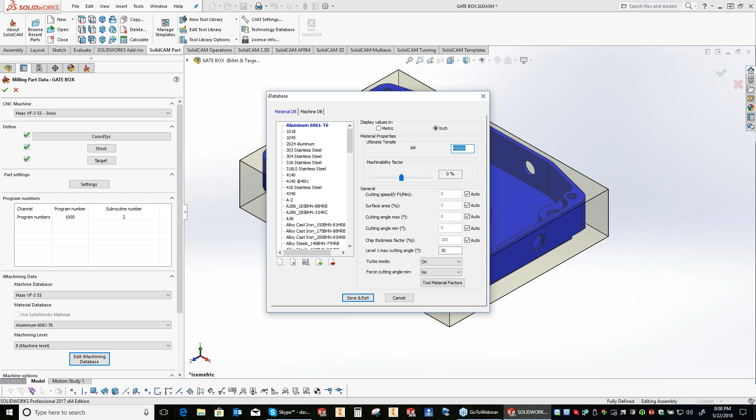Or what you can do is keep cranking that up. Just add 1,000 more to it. Go to 46,000, 47,000 until you find a really optimal feed and speed there for iMachining. Or you can play with this. I just think it's easier to do that. Anyway, moving on. Any questions about that? Hopefully not. No, looking good. All right. So we're going to move on to here.

First thing I do when I'm creating the stock and target, and I kind of blew through that really quick, is I want to make sure that I have good values down here for the facet tolerance. This means a lot. In turning, it's set at 4 tenths for the target. That's a really good value because it affects two things. It affects how accurate your silhouette snapshot of the side view of the part is, and it also affects what the stock and the part look like initially coming into Solid Verify.

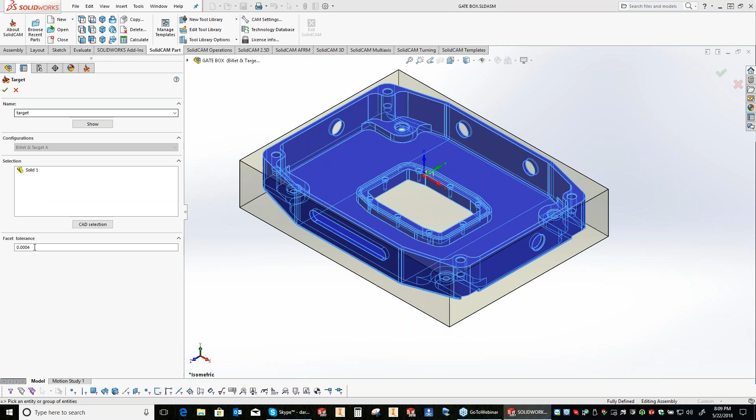So when it comes to the stock, I put it at 4 or 5 tenths, it's fine, and same with the target, generally 4 or 5 tenths, and I leave them alone. Now when we go into the solid model, and I'll talk about that when we get in there, there's some other facet tolerance that has to do with the tool, but the initial look of the part coming into Solid Verify has to do with those two values we just looked at.

So to speed up some programming time, templates are always the way to go. So if I come into, say, a face, templates can be created multiple ways. They can be created individually, or, well, I don't have any other toolpath right now, but you can actually highlight the toolpath in the list, right click on it, and create a process template, which I can't do right now because I'm not actually selecting processes, but I'll show you that here in a second.

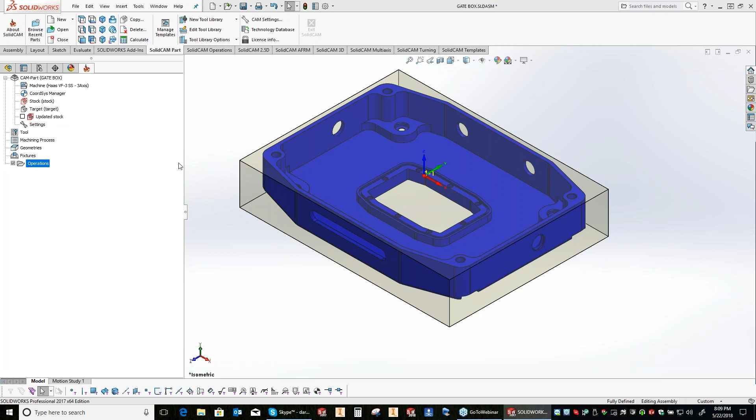Face templates, if you're not using them, or any kind of template - any toolpath can be templatized, just like probing or 5-axis, it doesn't matter. They all have the ability to create a template. You could set all your settings, or maybe you just always want one particular setting on, and you can have your template always come up. So every time you pull up face mill, you can have a very specific template come up. I don't do that on the fly, but you can do that.

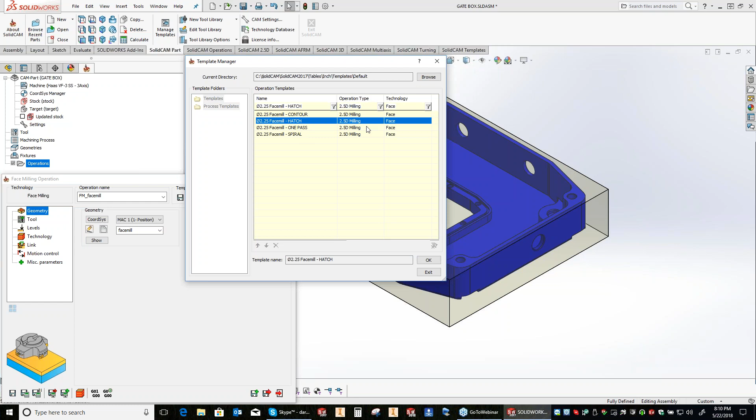What I have done is set up some common facing that I do: contouring, hatch, one pass, spiral. It all depends on what the part looks like. Generally in a square, I'm going to use a hatch, sometimes I do a spiral - it just depends on what the part looks like. But as soon as I open it, it's going to fill out everything except for geometry and levels, because that generally changes per part.

Now, this face mill name came from when I actually saved it. Now I can get rid of that and say new, or I can actually use that name and just edit it, and that would be fine too.

By default, it selects stock. Here's the other benefit of picking a 3D solid as your stock - it always shows up as a drop-down menu item rather than having to pick a model, chain of face, or pick a face or chain of profile. It's automatically here, so you get an extra benefit out of using that.

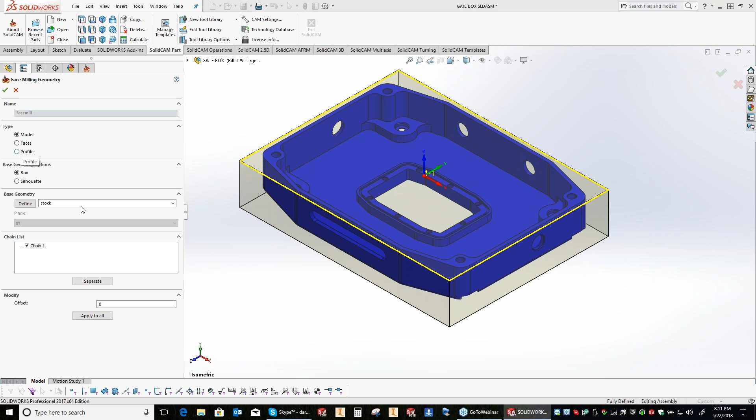Darrin, can I stop you just for one second here? You bet. We do have one question - when you were playing around with that stock and the target with the facet tolerance, is that affecting the toolpath quality for that particular part?

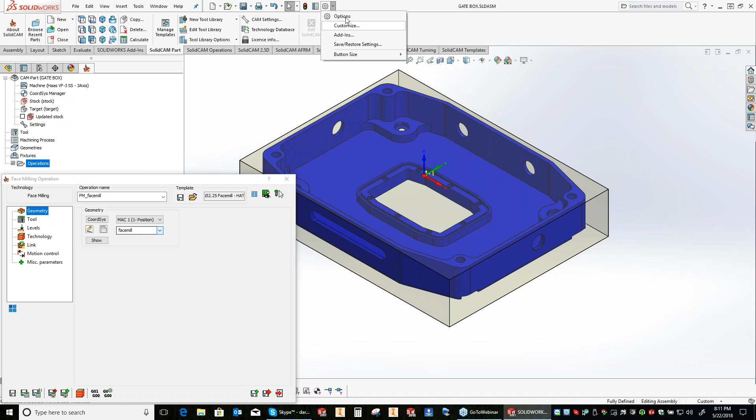No, not at all. It's got nothing to do with G-code in any way, shape, or fashion. It has to do with how pretty the part looks, kind of like the facet tolerance in SolidWorks. So if we zoomed up on this part right here and took a look at these corners, you can see the faceting right here. That's just a visual of what you're looking at.

Now, obviously, if you go with a really tight tolerance, when you're playing around inside here, your rotation could be slower, your computer can run slower. So what you're looking for is the best possible fit for your computer. If you're working with 6 inches and smaller parts, getting down into the tenths is no problem. But if you're working with 30-inch or 10 foot parts or something like that, you don't want to be in the tenths, otherwise it's going to bog everything down. So what you're shooting for is quick response. I have a 3D mouse right here, and if that tolerance was really, really tight, it would probably jerk a little bit or run a lot slower.

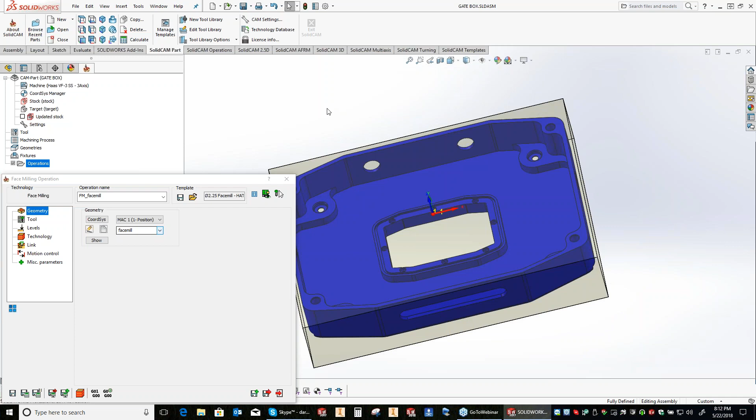So I forgot to mention that it does affect two things - it's not just the look, but the performance of your computer. So I think that answers it. What do you think? Absolutely. So the tighter the tolerance, the more horsepower is going to be required for the machine. Absolutely, but the end result is still going to be the same for you guys.

Yes. The only time a tolerance is going to affect it is if it's inside this tool dialog box here - then that will affect the actual toolpath. Any tolerance outside of a toolbox or a toolpath cycle means nothing. Well, it doesn't mean nothing, it just doesn't affect the G-code. That's all.

And kind of what Darrin is talking about here is like when we were looking at the HSM, the HSS, you guys have that tolerance that's built into the operation - that tolerance will affect your G-code. But 100%, yes, the stock and target are not going to affect the G-code.

So now, if you're cutting splines - because obviously when you cut an arc, you don't need a tolerance, since you're cutting IJKs or Rs, so it knows how to do an arc - there is no tolerance to mess with. But if that's a spline, then there will be a tolerance, and I forget where it's at now. There is a tolerance in here where you can adjust it. It might be on the first page, or advanced. I'll have to find out - I don't know if it's in face mill because you're not going to cut splines in the face mill generally. But anyway, there is a tolerance when you're cutting splines, and sometimes when you're actually in the geometry picking it, it'll be at the bottom of the dialog on the left-hand side.

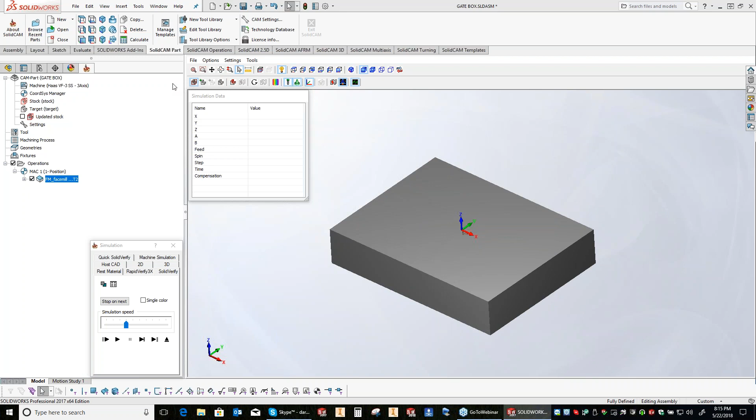Now in Solid Verify, how this part looks - this is simply square, but if I had rounded corners here, the tolerance we set in the stock and target matters. However, when the tool starts touching this stock, that tolerance is right here, and it almost always sets at that value. Like I said, I generally keep it down about there.

And I'll just show you - it's actually not going to matter on the face mill. So we'll go ahead and do a quick iMachining toolpath on it so you can see that a little bit better. So let's do that.

Now iMachining is definitely one of the toolpaths I use a lot. If there's just no better way to rough than in 2D, or even in 3D - you can actually rough out parts with the 3D iMachining, but it is just roughing. And then you would go ahead and finish with pocketing or profiling or something like that.

I prefer to use 2D iMachining with 2D parts. Yes, there might be a little more picking because you're going to be picking the edges. As 3D, it always works, just like in turning - it works from stock to target always, but it makes it very easy because you don't have to select anything, unless of course you want to keep the tool within a certain area. So 2D iMachining - definitely get used to it.

Since we have that new smart face technology, it makes the 2D iMachining much easier to grab chains. Yes, the smart chain thing is very cool. I'm glad they added that.

They've also added this dashboard. It's been in here for a little while, but not super long. Basically, anytime you see a dashboard, it's going to give you all your important information all on one page, so you can see it real quick rather than going all the way through this if you didn't want to. However, I'm going to go ahead and go through it.

We also added rough and finish not too long ago, simply because the tools last so much longer. You can do a 1 off, 2 off, 3 off part, no problem - your tool's going to be brand new when you pull it out. Now, of course, I'm talking about a part like this, 40 or 50 inches in length, and you're cutting a lot of material out. Then yeah, you probably want to do a rough, rest, and a finish with different tools.

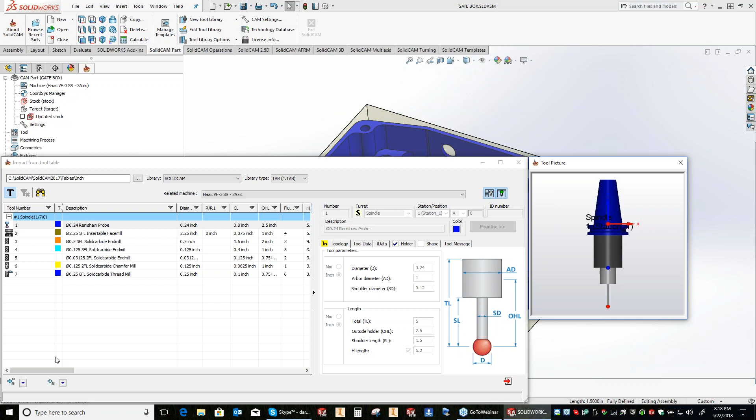That was a duplicate right there, because my face mill actually brought in my tool. You can elect not to bring the tool in, because there's a little checkbox at the bottom when you save a face mill to say go ahead and include the tool. I don't need two of these, so I'm just gonna get rid of it. Right now I'm just gonna grab me a half inch. I'm trying to think if there's anything in here that I need to talk about, not really, so we'll move on from there.

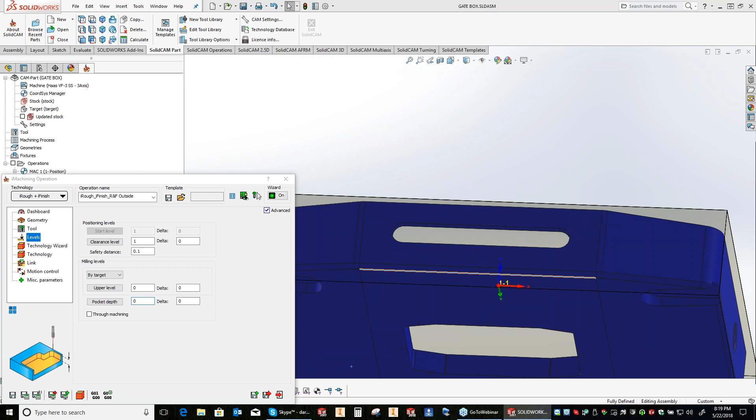As far as levels go, you're just gonna pick the maximum. The 0 is fine, that's where we're starting. And I'm going to go ahead and pick down here. In case you guys are wondering, if you haven't run into this, there are 3 ways to pick depths. You can pick a depth using a face, and notice how it turns yellow.

You can have any color you want, but that's actually remembering the persistent ID of that feature, of that face. You can also pick a vertice. The vertice will also remember. It's interesting that it's different - it might be down a little bit lower because it starts to bend - or you can pick an edge. A vertice or face remembers the ID, whereas the edge does not.

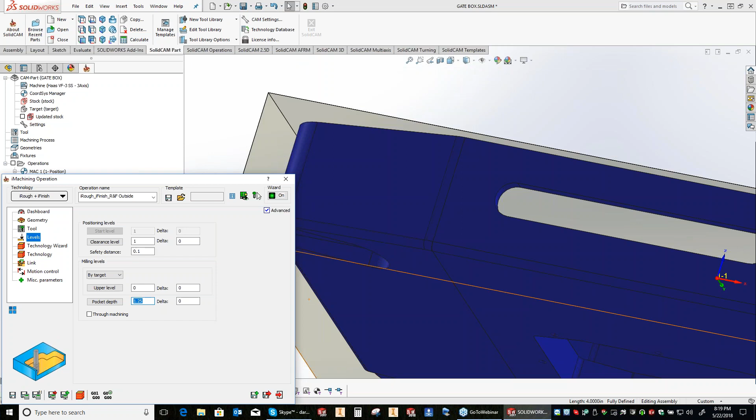That simply means that, let's say for instance I picked the top vertice here and the bottom vertice here, and then I put in a -100. If this wall gets thinner or thicker, my tool is always going to go down 100 thousandths past that if it changes. But if I don't have these IDs associated, and say this was 125, I would only be doing a total distance of 1 plus 125 - only 225. If that went to 250 thick, I wouldn't be cutting the whole thing. You'll get used to that.

Most of the time I'm just picking off of edges, because the other thing about that - when you go into templates, personally, if you're going to write a template, I would recommend not selecting vertices, picking edges, because then those values aren't tying to a certain ID of some other file. So I wouldn't do it that way.

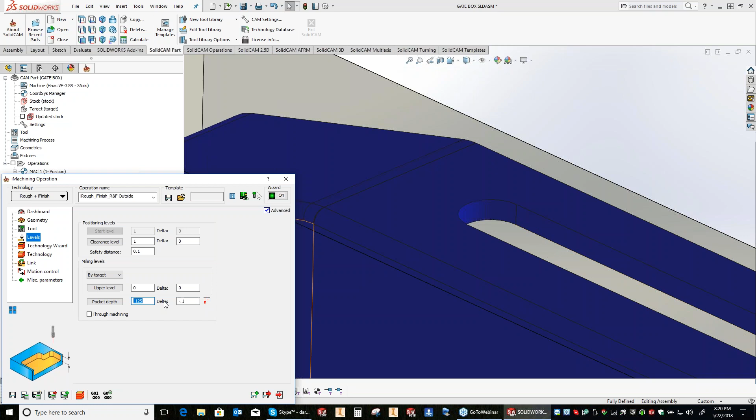Anyway, I got off a little sidetrack there. What we want to do - go ahead. No, that's a good note there, because even myself, I always pick off of a surface, so I keep it associative. But yeah, that makes sense - if you're picking off of a surface and using that as a template, when you guys go to bring in that template, it's going to try to be associative to that original face. Well, that original face obviously isn't there anymore, so it's a great point to know there.

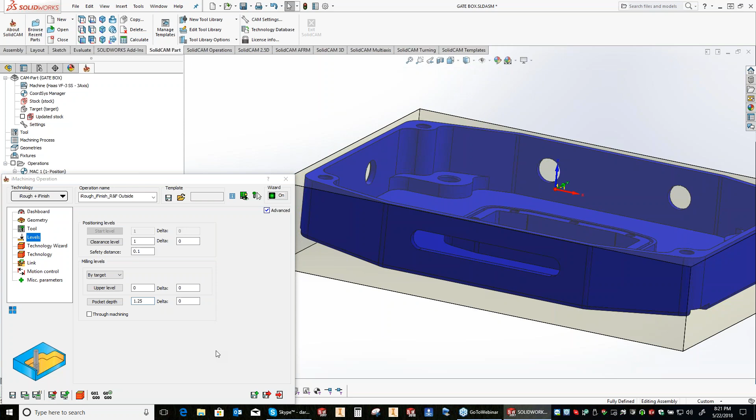And a lot of times the system can find your values for you. About 50% of the time that comes in already populated for me. Why, I don't know exactly, but it does. And I want to go a little bit further, so we could put a negative there. You could just add it right here. I'll just go an extra 50 thousandths.

Everybody's pretty much aware of iMachining, so I'm not going to go through too much of what's happening here, but I will tell you that if you're not getting the perfect result that you're looking for, the first thing that I would change would just be the step down value. You can do that by a step down amount, or by the number of steps, and every time you do that it may increase this.

Let's say I did step downs and I did say 4, okay? It will get thicker on this - what's it doing here? Yeah, 2.4. Let's try that, it should get thicker. What's going on here? Oh, all right - step down, no, number of steps is what I meant to do. Sorry. So there are 4 step downs at 322, and notice how the side gets thicker. That's the way it works.

But sometimes this ends up into a better result. I would never recommend doing it like that - I'm just saying, in a deep depth of cut, you might, even though it can do 2 inches, you might think about doing 1, because you can actually get faster cycle times, believe it or not.

So anyway, I don't know if I mentioned when we were doing the night classes before with the iMachine, but we have the red, yellow, and green. Green is always optimal. A lot of phone calls that we get are, what's the best tool to use for iMachine? Well, it's going to tell you if it's green, yellow, or red, and that's all based off of the

ACP. So maybe you guys are running a high helix, and maybe we shouldn't be running a high helix, or maybe we're running a 2 flute and we should be running a 5 flute. So play around with your number of flutes, and your helix angle is really what's going to control that red, yellow, or green for that ACP. Right. The ACP stands for axial contact point. Basically what it means is how many flutes are fully engaged in the material at one time.

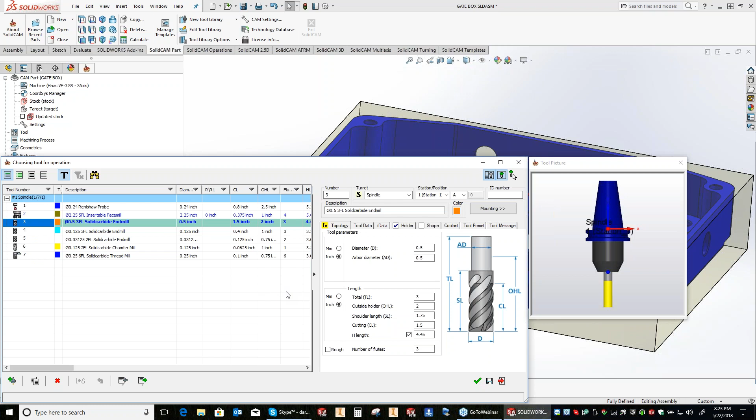That's all it means. Now, what he was talking about, Kevin, is that there are 5 parameters on the tool that iMachining looks at. We look at 3 on the machine, 1 on the material, 5 on the tool. The ones on the tool are the diameter, obviously, the cutting length, the number of flutes, and then in your iData, you're looking at the makeup of the tool, okay? And you're looking at the cutting angle.

45 is basically standard. Now, I don't like 2 flutes. I think they're loud, because they're opposite each other. I like 3 flutes when it comes to the softer stuff, and 4 to 5 flutes when it comes to the harder stuff. If you're picking a tool for iMachining for aluminum or something soft, what I highly recommend is polished rounded flutes. You don't want a cheap tool. I could name a few, but I'm not going to.

When the material hits that flute, it has to do basically a 90 to get out of there. The best tools are at least rounded, and then they're polished if they're a really nice tool. And I'll tell you one that works really well is a 1/2 inch Blizzard tool. That thing is beautiful. It's quiet. It runs great, and it cuts a long time. The coatings don't matter. We're not even paying attention to the coating. Okay. In harder materials, coatings matter. I would still use the coatings.

In aluminum, you don't want coating, because coating actually works better the hotter it gets, like TiCN, TiAlN coated. The hotter it gets, the harder the edge becomes. So in harder materials, that's a great thing to use. But when it comes to aluminum, it doesn't hurt it, but you can actually get a better result if you don't have coating on it, because coating actually rounds the edge a little bit. So you want to stay a little sharper in aluminum. Let's just back up here.

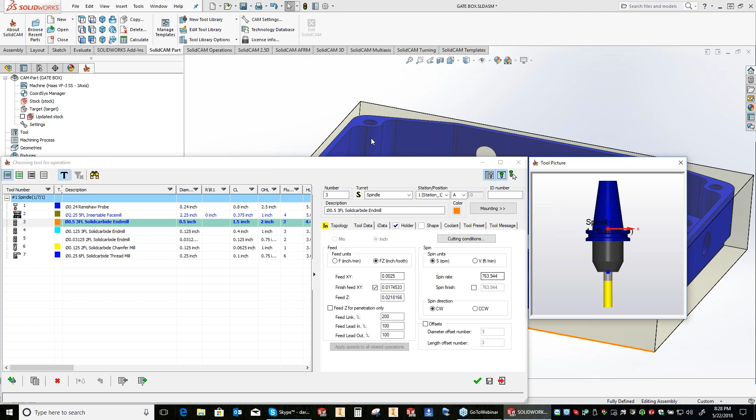Okay. Anyway, where am I? Let's close that. Where are we at? Okay, we were here. So basically, when it comes to red, yellow, or green, it's really talking about tool life. That's all. Green is obviously the best, but I couldn't quantify it for you, green versus red, how much longer it's gonna last. I don't know. Because the technology is still great the way it cuts, because we're managing the side engagement rather than a depth of cut. And the best thing about it all, honestly, is the fact that we don't bury the tool anymore.

Now, I do want to show this in case people haven't seen it before. Why this technology is amazing is, let's say that's the wall you're cutting. Okay, and then we have a tool. Then we have another wall. Okay, and then we have material. Let's say the material is going this way. Actually, we'll undo that. Let me do this. Okay, and then, let's say it's the same amount of material that you're taking off.

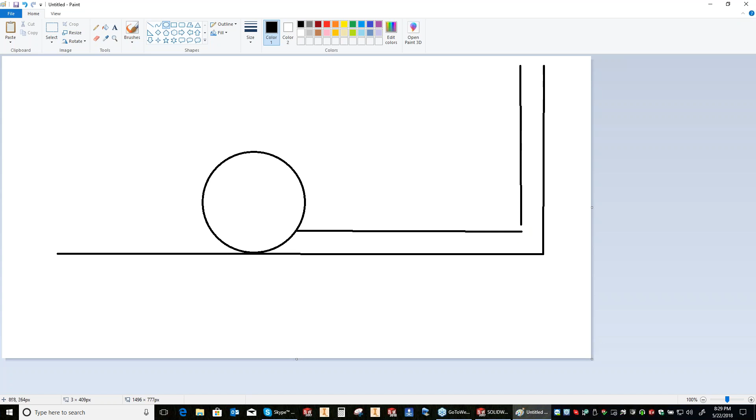The problem with traditional machining is this. It's simple, and I know you guys know this. I know this is the wrong size tool. Sorry. Let's do it again. All right. So what we're managing in iMachining is simply a cutting angle. Okay, we're managing that right there. But see, once you hit it with the same exact material on that side, the over-engagement of the material on the tool is detrimental to that tool.

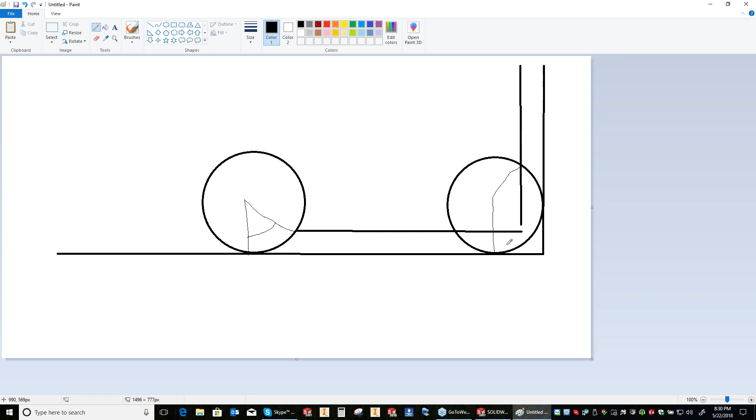We've done 4 years of research on this and seeing what happens to this, especially as we're going this direction. What happens to the tool at this point right here, this pressure vector, is horrible. So we don't go over 80%. You will never see this, even in aluminum, ever get past 80%. 85 to 90 is where all the bad stuff happens.

So what I'm basically saying is, when you go into those corners and hear those squeaks, you're basically hearing your tool deteriorate. Yeah, because it's creating micro fractures. It's heating up and cooling down real fast, taking smaller depths of cut, all that. Anyway, I'm not going to go any further now. I know you guys know that.

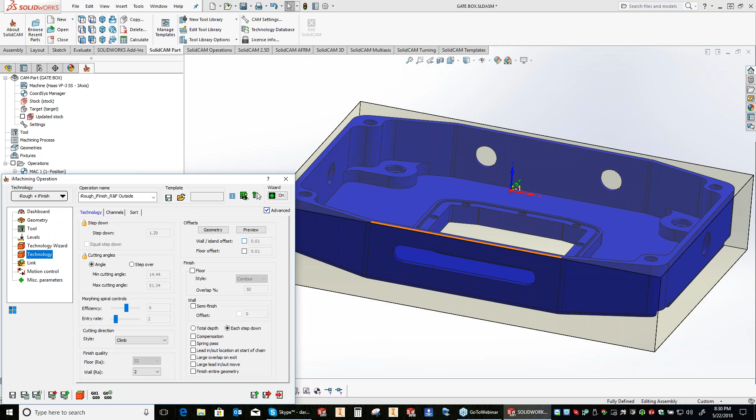Let's go ahead and leave 10 for the wall, and we were going to go into solid verify for some reason. I don't want to get off track here. Simulate, solid verify. Now, there was a reason I came in here. Oh, yeah, that's right. The tolerance that we were talking about. Okay, so basically what that tolerance is, let me pause it right here.

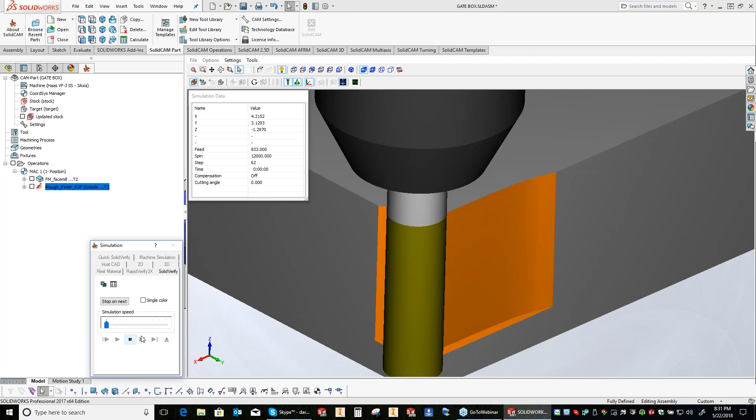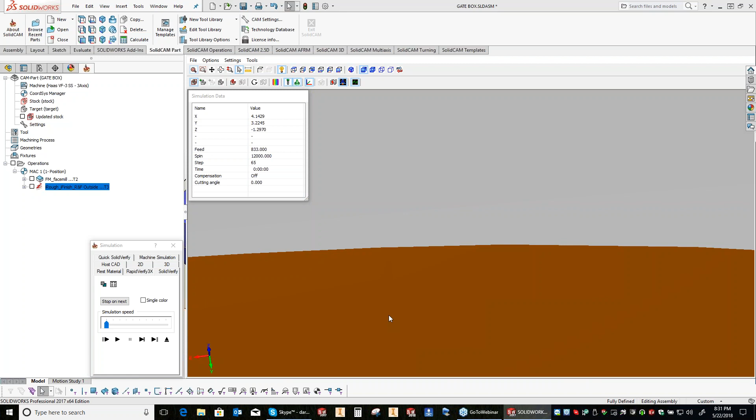This tolerance, this accuracy right here, is a tool facet tolerance. So if we look at the tool, it's the facets of the tool, which means wherever this touches, it's the same faceting. That's harder to see on that one, but you're basically getting the same faceting that you see on your tool. That's what it refers to. So the tighter the tolerance, the prettier your part looks. Let me go ahead and play this out. And this has nothing to do with your G code. Correct, no bearing on it whatsoever.

But it also plays into, so there's your tolerance. You can see your facets right there. That's a little better. When you go to use your compare, if anybody ever uses compare, I gotta explain this in case you don't know exactly how this works. Everybody knows that computers are binary. They're ones or zeros. That's it. Every little thing in your computer is a switch to flip up or down. It's on or off everywhere in the computer.

That also means, in the early days of programming, they had seminars about GPF faults, which is basically anytime you divide or multiply by 0. Well, this is all in line with that.

Basically, what I'm saying is, if we were going to do a compare and execute this, notice how this is red, green and yellow? That's because of the tolerance that you set up here, and that accuracy, that's the tool's tolerance. And you can see it waffle between green and yellow. All yellow is between 0 and -5. All the green is between 0 and +5.

And you're thinking, well, wait a second, could I be up to a -5 and a +5? No. Going back to that GPF, you never want to divide or times by 0 in a computer language, otherwise you get a GPF fault. So the value that actually came out that you actually cut could be a positive 0.000000002 or 10 or 15, doesn't matter. It's way past the tolerance that your machine is going to hold anyway.

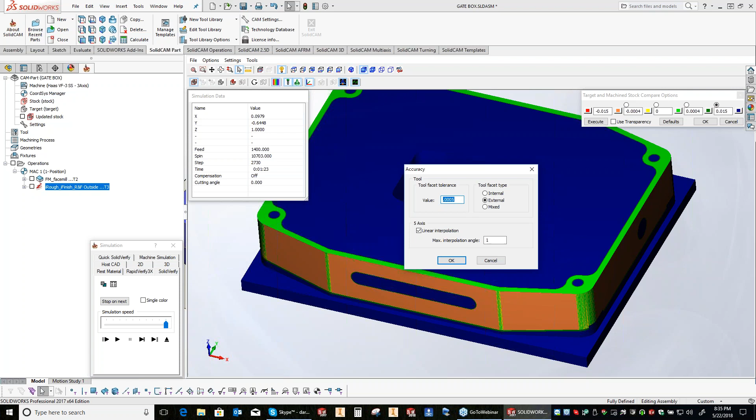Now, I caution you against this unless you've got a really nice computer, because we will take it down to 1/10. We'll take it down to 1/1,000,000th or beyond if you want to. A lot of CAM systems will lock these out, and they won't let you do something like that. That's insane. You can do it if your computer can handle it. I don't recommend it. So just know that this value, you can only go down to within this value up here.

Yeah, and for the solid verify stuff in here, and we're kind of getting a little off subject here, but for all these little icons that Darren's talking about, like the stock target comparison, holder, all that stuff, we're actually going to be going through that next week in the night class for you guys. I know there's always been a lot of questions of, I see all these icons, but what are they doing for me, and how do I use them to benefit me?

Oh, that's cool. Yeah, that'll be nice. I know most of them. I don't use them all, but that's probably the most important one, but I won't talk about it because you're going to do that next week.

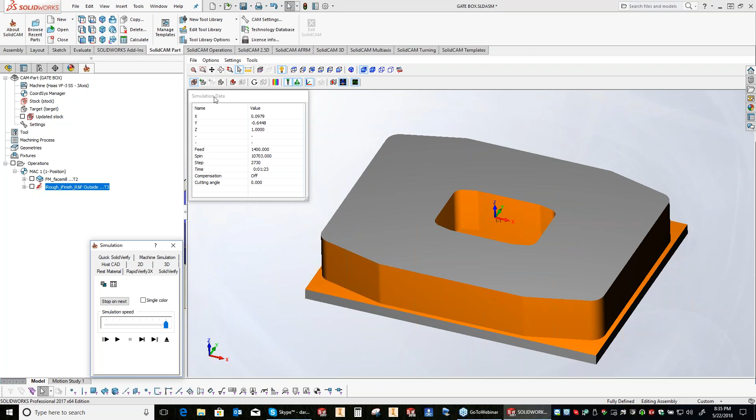So anyway, moving on. Now here's how I can program faster. I use a lot of templates and I use a lot of save as copies. I've just filled everything out, and that could have come from a template, so it could have made my life even easier. But I filled it out once. It took me a minute maybe. Now I can just simply do a save as copy. Anytime you do a save as copy, it creates a brand new one, exactly identical. And if you use a template, either one, the only two items you have to check are geometry and levels.

I'll also tell you this. Once you pick the geometry, so if we go into the geometry and I say new, I always pick areas that have already been milled out and I mark those open, okay? And then I want to chain this pocket here, and we'll call that pocket. I like to name my stuff. Now, if I go to my levels now, it's going to call me a liar. No, it didn't. Good job.

So basically, because my upper level has not changed, it actually found the next level down. I can test that by putting my cursor in here and selecting the edge. It's still 875. So really, the only thing I had to do is a save as copy and change my geometry. Everything is identical, but I get a different toolpath. And I can do that again for the floor. Save as copy. Now this is really neat too. I'm going to check just the geometry and just the levels again. So my new geometry is going to be the floor.

Okay, and then you guys know that you can go up and down because it doesn't really matter what it looks like from the side view. It matters what it looks like from the top view, in 2D. So I can do that, or I can do here, I go up, down, doesn't really matter. So I'm going to chain those two, and we'll call that floor.

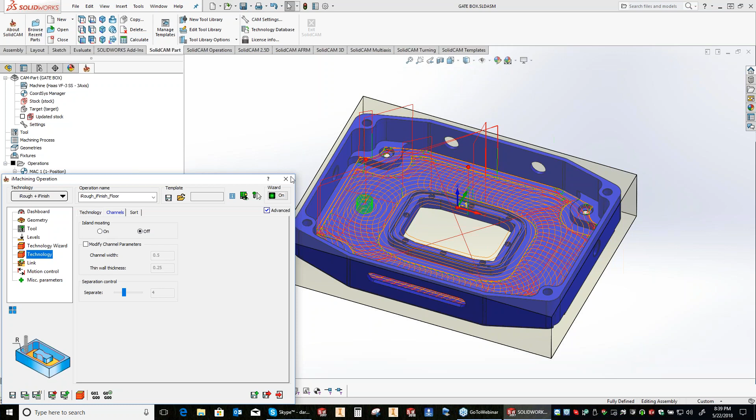Hope that made sense. I'd prefer to do it that way. That's more of a D-slot style cutting. So saving copies is definitely something that can really save you a lot of time. But again, if you want to set up your templates to turn on and off things, it's definitely a good way to go.

Now, as you guys are going through programming parts, I know Ronnie's got some pretty crazy, nasty looking parts that he does every once in a while. But if you guys are doing a lot of family of parts, definitely set up your tool library. Take the time to set up your tool library of all the tools that you have in your shop. And then also take the time, as you're going through these parts, to create the templates for these ones,

because as you run this on the machine, Eric is saying, man, that sounded great, the surface footage was good, my step downs were all good. Create that as a template, and remember that you have that as a template. So when you go to run that same tool again with a similar pocket, you can just grab that, and it's automatically going to have your tool and the speeds and feeds of that tool. Everything's going to be preset except, just like Darrin said, the geometry and the levels. That's all you have to set. So definitely use those templates as much as possible.

And Darrin, would you say that you use the templates more than anything, or what's your take? I use a lot of templates, but I use saving copies all the time. That's my favorite thing to do. And sometimes I'll even jump up here and do a Control-C, Control-V, because you can do that as well, even from one setup to another setup, and just simply change the coordinate system. So if I like it, I just come up here and grab that one. It's got my right tool and everything, and I can copy it down here. I do a lot of copies. Now, the templates that he was talking about were not just inside the individual toolpath, but multiple, like let's say you wanted to do those.

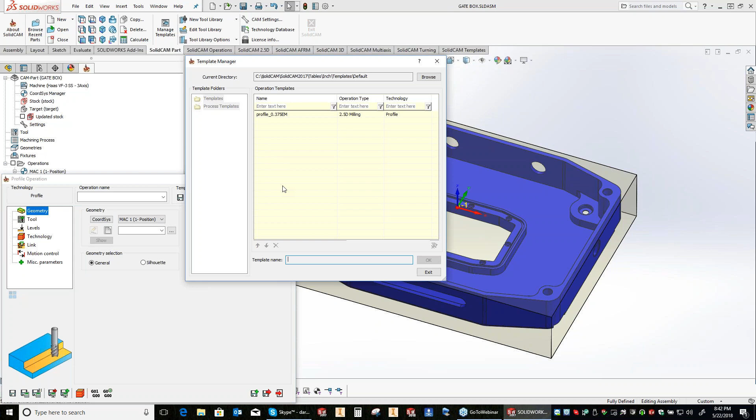Let's do a pocket or a profile, okay? And then if I go to look for my templates, where are my face templates? Well, they don't show up because I'm not in a facing operation. It's only going to show my profile templates in a profile operation and a face in a face operation. So if you've created them and you're like, I don't understand why they're not showing up, that's why, because you have to be in the operation, okay?

Other things to speed up your programming time, and I'm not saying all these are great and you have to use them all, but there are some pretty cool things in here. I would like to make broaching a little more robust, but I'm glad that we have it. There's a lot of ways that you can do slotting, and a lot of these use iMachining type toolpath as well. I personally have slots like this. I use profile, and I do a ramp down just like an O-ring grooving. But O-ring grooving, let me just show you that actually.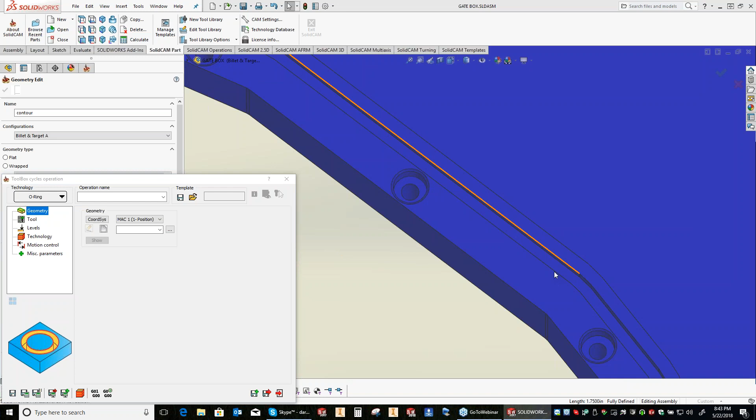What's nice about this is it actually tells you what to pick. It's visual. We have like 4,500 pictures in the product. So it tells you to pick the two top edges. So if we come over here, and by the way, if it's a straight O-ring, you can grab the bottom edges too. It doesn't matter which one you grab first. It doesn't matter the direction of the arrows. Just grab the two top edges or bottom edges. If it's a dovetail, you want to pick the top edges for sure.

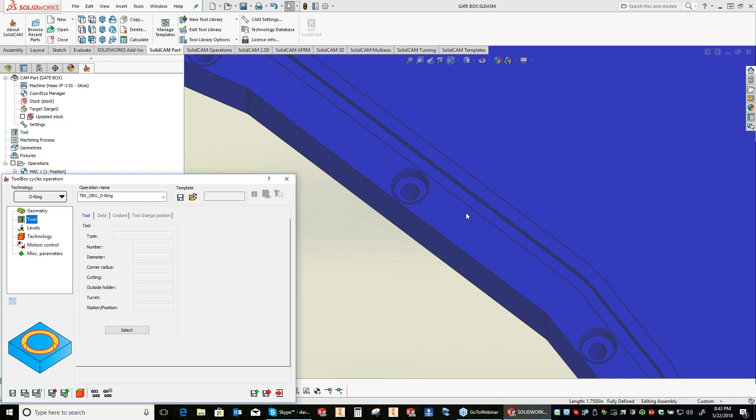Okay. Let's go ahead and do O-ring. Now, what I like about this is it's very similar to a template. It's similar to iMachining in that you're going to fill out geometry, tools, levels, and then technology is going to kind of take over for you. So let's go ahead and do tool. And the best thing about this is you don't have to figure out how wide is my slot. You need to put a tool in that'll fit, but you don't have to know the difference, and this is why.

After I pick my level, so we're going to start here, and we're going to go down to here, and I can pick the edges too, but what happens is that it's looking at all this stuff, and now based on that tool, it's saying I'm going to drop 15.6 thousandths per pass. It figured that out for me. That's what it wants to do. Now you can increase that. You can overwrite any of this. But here's the best part about it, about speeding stuff up.

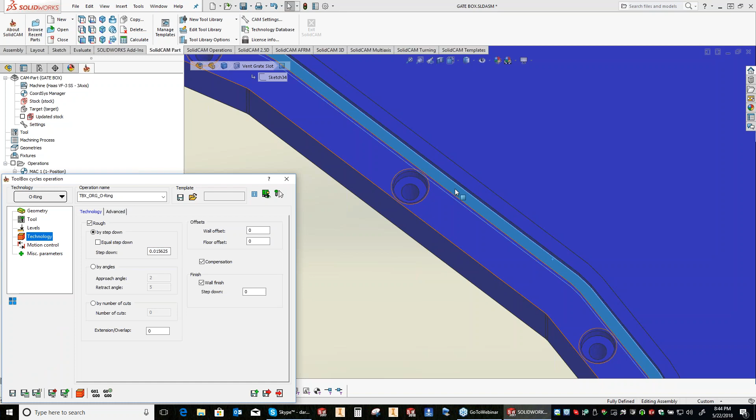Say you want to do a wall finish and a cutter comp. You don't have to figure out your straight line move, how long it needs to be in order to turn cutter comp on so you don't get an error on the machine. You don't have to figure out how big of an arc it needs to be. Actually, let me turn that off and let's first do this so you can see the ramp down. Okay, so there's the ramp down.

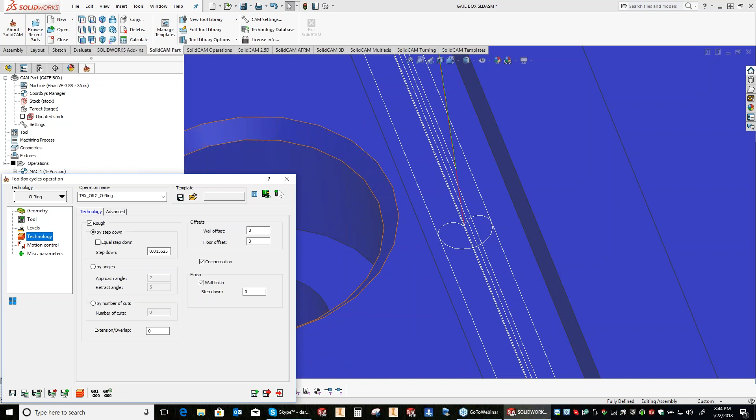Now, if you decide to go ahead and do a finish, we need a straight line move to turn cutter comp on, and we need arc ins and arc outs in order to do finish passes. That's where it comes in handy and does it for you, so you don't have to think about it. Now, you could do this with the profile, but then you'd have to figure out your arcs and stuff like that. It's not that difficult. It's just faster in here. That's all I'm saying. So definitely, find the ones you like.

This is definitely one spot that gets majorly overlooked inside the software: the toolbox cycles. There's a lot of really nice stuff in there to help you guys out. Darrin likes the O-ring one. My personal favorite is the additional zigzag slot for doing slots. It steps down in a zigzag pattern, but also factors in something like an iMachining morphing spiral to get that slot wider, and then does one final finish pass. That sounds awesome, I haven't used it either.

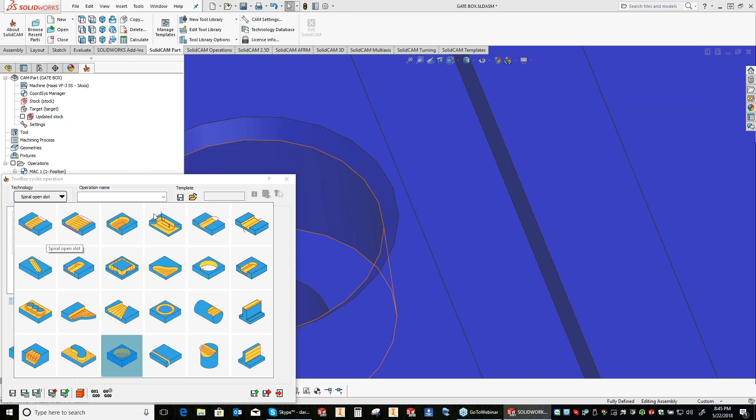Obviously one of the fastest things to do is your automatic feature recognition. We're not known for feature recognition, however I think we do it better than everybody else, not because I work here, but because we don't have 15 levels deep you have to go in case it doesn't work. Here's the other benefit of working inside SolidWorks, especially with a native SolidWorks file: we're actually taking the criteria from the actual hole wizard that you produced that hole with, whether it be a tapped hole, counterbore, countersink or whatever. We take that information and use it to create everything for you, including the tools.

Now how do we do that? Of course we have to have a dialog box, but we only have one. We don't have 15 or 20 or 25. If something goes wrong, you only have to look at one thing. Actually, you don't even have to look at that - you could just open up the toolpath and change it.

For instance, the feature recognition hole wizard process - right now this is our first iteration of this. We put it on hold, and it's been out for a couple of years. We wanted to see how it did, and now they're starting to work on it again because people really like it, and it works fantastically out of the box. You do not have to set this up. It works just like this. I didn't have to customize it for this at all. I built the part, tried it on it, and it works.

Simply put, you pick a tapped hole, and it's going to find all the other holes that are identical to that hole - depth, diameter, everything. Once it finds it, it'll turn them purple on mine. It may change colors on yours depending on what you have, and it'll turn this little check mark green. As soon as I hit it, it's going to build the tools mathematically and the operations for you based on the actual criteria it needs right in here. If you happen to have the tools in your library, it will use those. But if it doesn't, it'll create them.

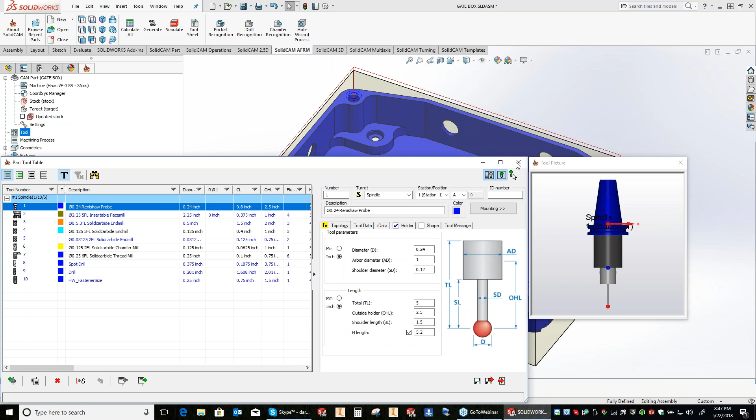Now, can you replace these? Absolutely. Here's the other reason why I think it works better too. In most other feature recognition systems, if something's wrong in here, you have to delete these, go look for that problem in the database somewhere, fix it, come back, and then rerun it again. In ours, it's just a toolpath - you can come in here and adjust anything you want.

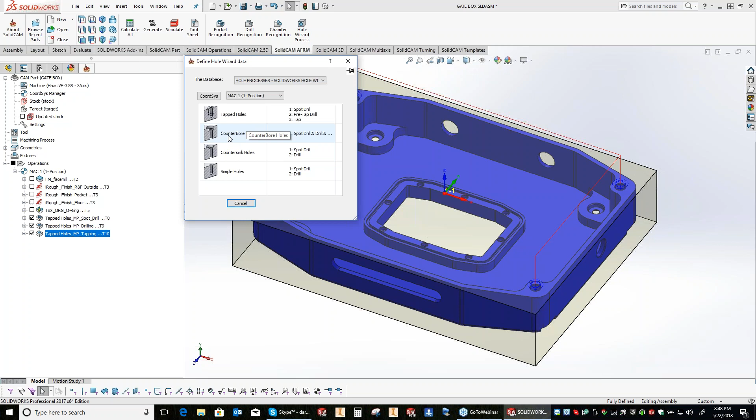The cool thing is you could start out with a quarter 20 - I think that's what these are, quarter 20s - and then manipulate, go into each one and change them around, make it a tap for a helicoil or something, and then come back and create your own template. That's a simple way of doing a machining process, and I haven't even talked about that yet. I'm going to show you guys, let's do one more with the counterbore, and then I'll show you the 7 different ways I know of programming faster. Some will work better for you and others won't, but I'll still tell you all of them I'm aware of, if I can remember them all.

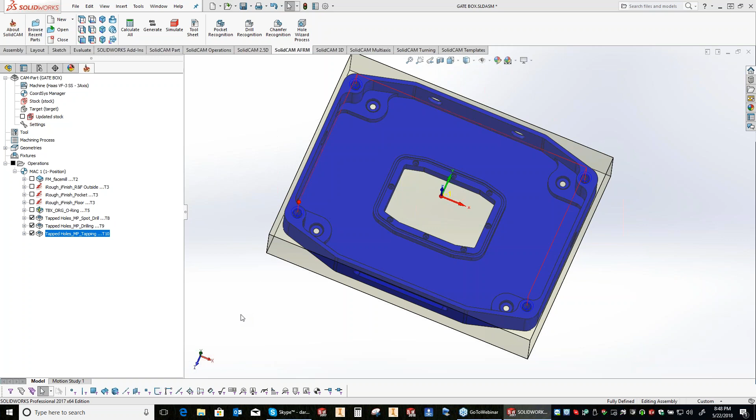So I'm going to go ahead and grab that counterbore there. Again, it's going to find - why is my mouse not working? It'll find it, and as soon as that turns green, there we go. Found those holes, select OK, and it'll create your tools for you. Now, before I go any further, there are 7 ways to program faster, not even using the hole wizard or anything like that.

Templates is one of them, okay? Saving copies is two. Machining processes is three.

Creating a multi-process template is another. Then you can do things like this. Let's say all these tool paths, in some form, you probably can use on a different part. What you can do is just take all these tool paths and apply them to a new part. How do you do that? Well, you first come up here and save this job as a new name. This one's called gate box, but let's say I'm doing another box of some sort that's similar, or maybe it's not similar at all. It doesn't have to be.

I do a save as, and I rename it to the new part name that I'm going to open up. So I start with that. It's going to close this, and open up a new project with all this stuff in here with a different name. Then you come up here again after it's open and say change model reference, and you can actually pull up the new part name. Now it closes it again and pulls up the brand new part.

It has all these toolpaths, and now you can take these and simply apply them to that part. You'll have all your tools, all the feeds and speeds, all that stuff in here. Again, like a template or a saving copy, all you have to change is your geometry and your levels. That's all you have to change. Now you might want to change the tool because that particular part got a little smaller, but that's just one way of doing it.

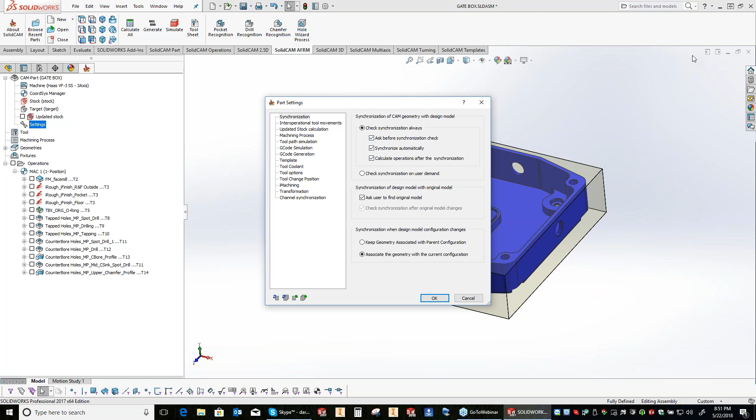Let's say I want to look at the configurations and be in fully automatic mode. So I'm just going to switch it to current configurations, and turn all these on so it updates automatically. Now what you must do is rebuild and save it. I think you can just exit, but I always end up saving it. Then open it up again, actually. That's all you have to do.

Now, by the way, guys, you know we don't have a save button technically. We have a save, a save as, and a close. Close is the proper way to close it, save as is the proper way to rename it. However, if you use save as, save all from SolidWorks, it does save our project.

Okay, now that I've set that up for a new part, watch this. I'm going to turn all these on, so that's all the toolpath for this particular part. I can jump into configurations. I'll go to my worst one, which is a lot smaller. It's coming up saying, hey, do you want me to check the synchronization? Yes, I do. Obviously I've changed my toolpath here, so yes.

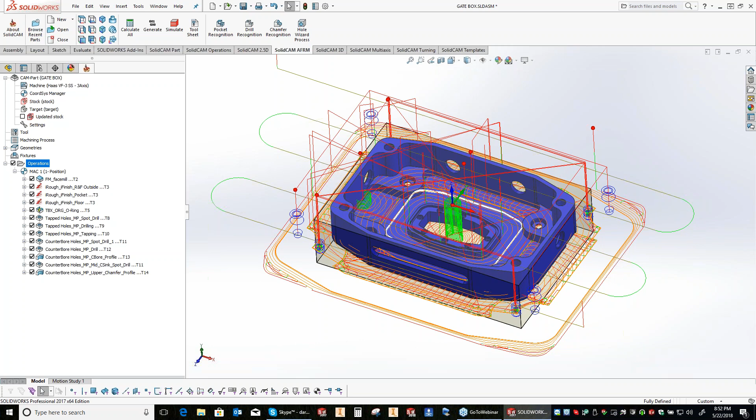Now I'm going to come back here and see if I can get that open. What it's going to do is look at the new configuration, walk through there and reset all that for me. Now, there are some things that can happen.

For instance, on this part, I could have adjusted it to make it perfect, but I didn't want to, because then I couldn't show you this. Let's say I go back. Okay, that part got really small. Let's see if I can get back here and... come on, click. There we go.

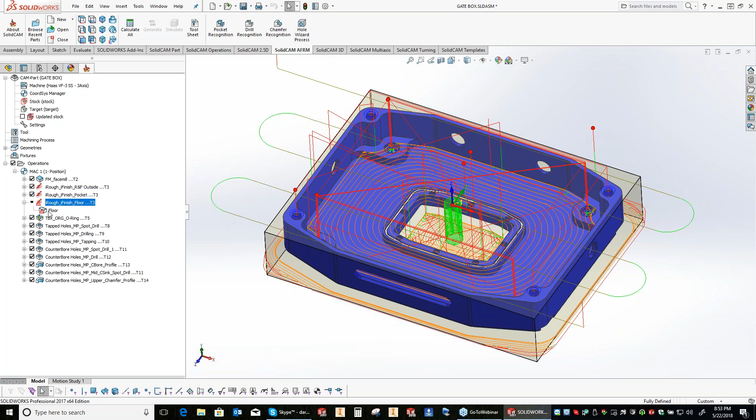See, this one right here didn't fully regenerate. You can always hit the little plus sign here and it says floor. Something's wrong with the geometry, the floor, because I named it floor. Basically what happened is when I shrunk it down, this little edge right here—and that might be a bug. It's possible, Kevin. That's up to you to let me know.

This disappeared and then it came back. Technically it should find that edge again, so I think it actually is a bug. But to fix it real easy, you just go to your floor geometry, edit, and redo it. Just repick it, so we'll do this.

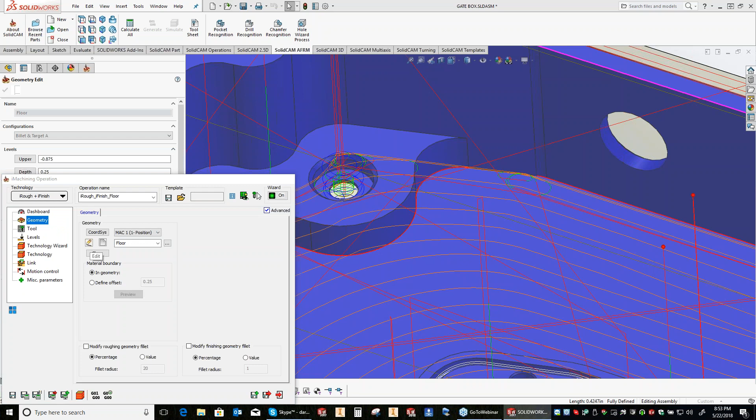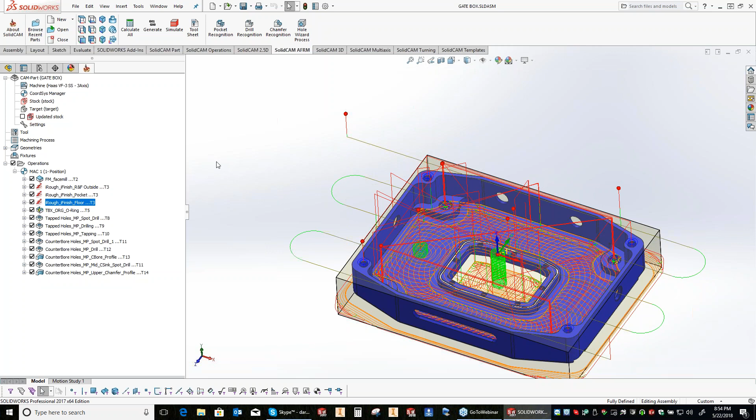Another easier way Darrin could have gone about that is, instead of hitting the plus button down, you can just right click and modify the geometry from right there without even going into the operation. Yep, something I never do. See what I mean? I don't know all the tricks, but you can right click and edit, generate a sketch, show, synchronize, whatever you want to do. With Kevin and Darrin, you guys will learn all the tricks. There's so many ways to do things in here, just like in SolidWorks—you just have to decide what works best for you.

Now, last thing I'll show you guys, it's really amazing. If you haven't been using it, you should. The chamfer is just really cool—that's a user-requested feature, multiple people hit us up on it. You can pick individual edges or click the whole thing and let it parse the model, then come in here and delete the edges you don't want to chamfer. Pick a tool, preferably something small so you can get nice and close to the wall. That's why I always have my certain tools around—I've got a little 1/8 inch with a 45-degree chamfer on it. Looks like that, real simple, okay?

And then put in your chamfer size. You don't have to have the chamfers on here, maybe you just want to break the edge. There you go. What's cool about this is it's a 2D toolpath, yet it'll give you all the different depths and stuff, and that's usually a no-no when it comes to 2D toolpath—only 3D toolpath does that. Normally you have to do these individually if you're going to go at different levels. But that's going to speed stuff up for you guys a lot.

Now I'm sure there's a lot of other stuff, but we're about out of time. Any other questions? Now's your time, Ronnie, to pick Darrin's brain, or anybody else—Ben, Carlos. My brain on several occasions. I'm not seeing any questions come through here. There's been times where... oh go ahead, go ahead. No, go ahead.

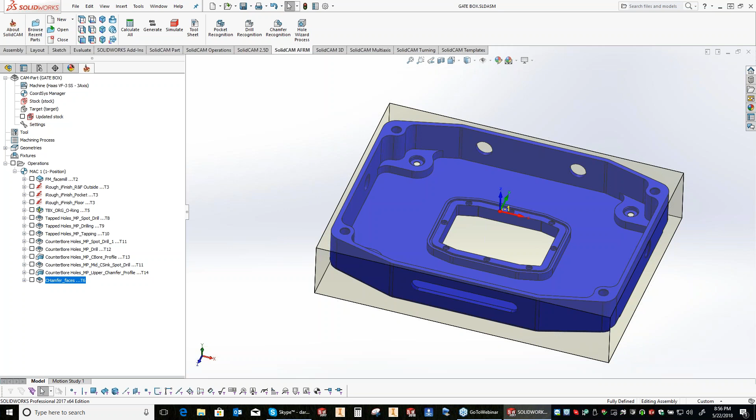So now, is Eureka one of the G-code simulations? Yep. No, it's not. This is. Yep. Oh, it is. Oh yeah, there it is—Eureka. Yep, okay, it's right there. So basically, when you generate G-code, you can have Eureka automatically open up your G-code and you can verify directly from there, which is nice. Yep, and it's going to pull, or with Vericut or any of the other ones.

Yep, and what we'll actually do, guys—I still got a couple guys, there's quite a few guys still in here—we do also have Octopus in there. Octopus is more G-code as well, but it also deals with robots, with welding and so on and so forth. Do you guys have any interest in seeing how Octopus works with SolidCAM as well? Just throwing that question out for everybody here. Yeah, go ahead and vote.

I'm just going to give you my opinion—you know, Vericut is awesome, it's hard to learn but it's awesome. There are two trains of thought here: some people swear by G-code and say that's the only way you should be verifying, and then you've got our stuff, which is machine simulation, internal machine verification. Just FYI, both sets have to have a reverse post. The reverse post is what actually makes the G-code work in the machine, and it's also what makes the ink file internally work. So it's really six of one, half a dozen of the other—it's what you prefer, but they're no more accurate than the reverse post that's got to be created. Sure.

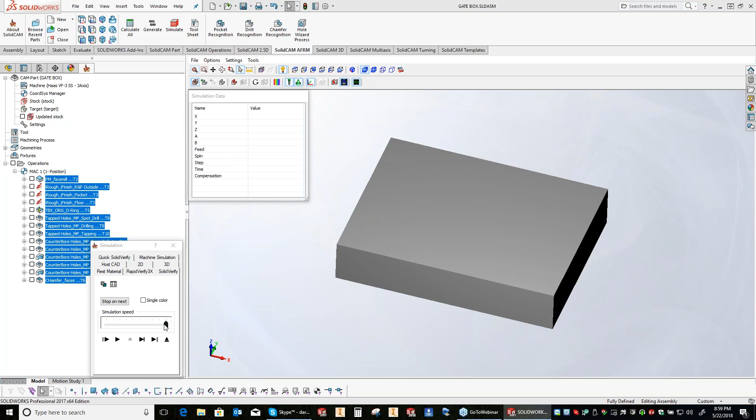Actually, there is one more thing I want to share with you guys. If you're trying to verify really fast in SolidVerify, there is another way you can do it. This can slow it down or speed it up, and I will just tell you that ball nose tools are always going to run slower because there's a lot more faceting going on. But if you're already up to level 8 or 10, and it's still not running very fast, and you want it to go faster, just simply set your general right here.

This is showing, I always hit defaults, this should say 0.004. 15 frames a second is about the same as 1 G-code line, basically. That's what that says. And so let me hit that, and I'll show you how much faster. Let me go back, and I'll just rerun it so you can see it. I was talking, and I didn't get to change it in the middle of it. So general, let's start with 1. Okay, I'm all the way up here.

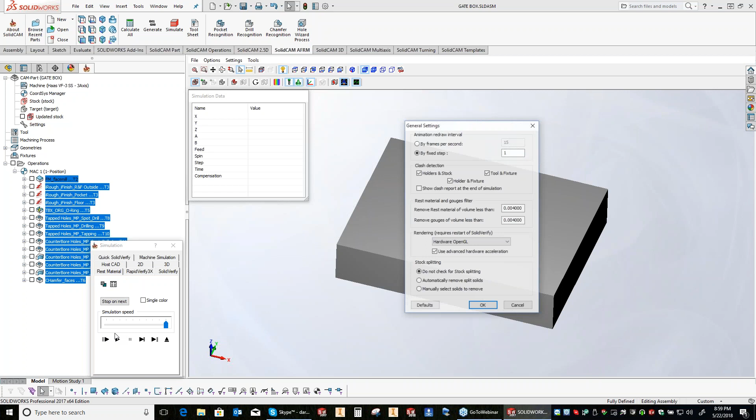But now if I change it to show every, say, 30th move, it's way faster. Or 100th move, whatever you want. I think it only goes up to 99. I've tried above that, 999. Well, I don't see a big difference at that point. So up to 100 is what I've seen a difference on, and that's about it. So yep. Just FYI.

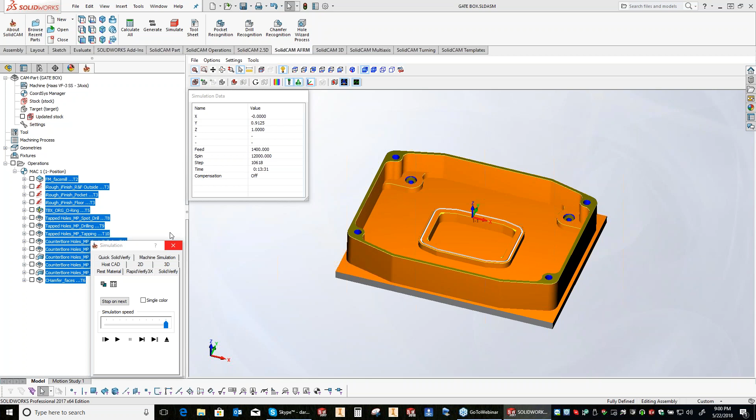And Eric is asking, can you show how to do the multiple configurations again? And Eric, correct me if I'm wrong. How to build them or how to set it? I think how to set it up in your settings. So when you're doing multiple different configurations, how to have that set up in settings. And Eric, if I'm misreading that, please let me know. There are 2 ways to do it.

If all your parts have configurations, I would go like this. I'd go into your main settings when it opens up, and then go into, where are they? I never set it up from here. Yeah, synchronization. Now I'm in a part which is grayed out, but you can say it's always a current configuration, and then you can check these. Now this one right here, I don't normally check, but I do if I'm going to do configurations, because anytime you switch, it automatically sees that, and then it synchronizes automatically and it calculates automatically.

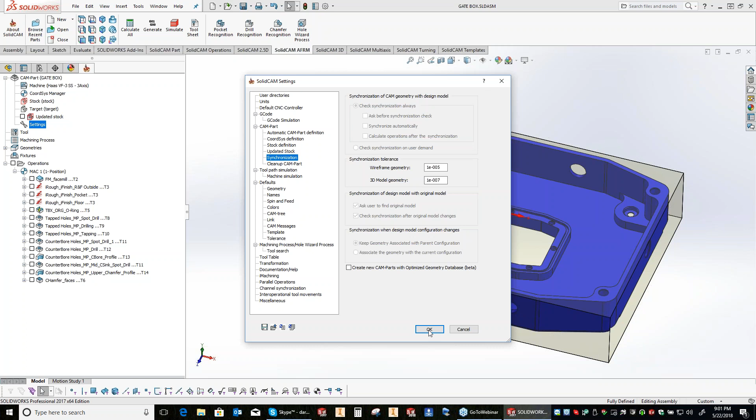This is important. So I would check this one and then all three, or all three and then this one, whatever. Because that way, anytime you switch configuration, it'll automatically update. Now this is if you're going to set it from here, if all your parts have configurations. If they don't, only one or two, start your project and then do the configurations from here. Notice how the settings, there's a lot less. Basically, it takes the main settings from here and it pushes down all the stuff that would apply to this part. That's why there's less stuff. Okay, and all the other configurations are based on the whole entire CAM-Part.

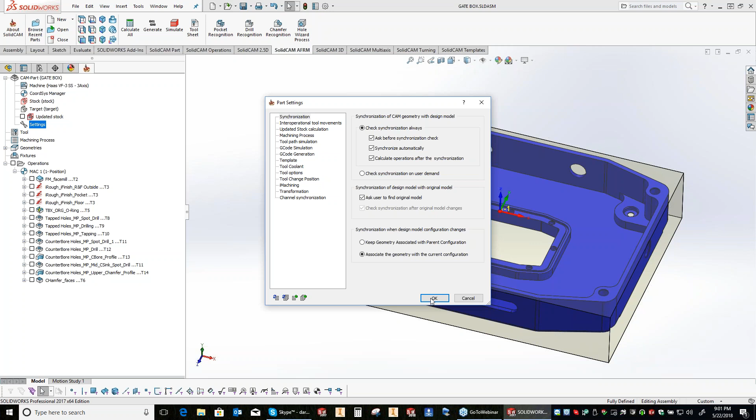So now go to your configuration tab, and Eric is running a family of parts that are all identical, but that have 3 different thicknesses. You want to show how to add a configuration in there? Oh, okay, sure. Well, this is more of a SolidWorks functionality, but they always have one that's named weird, and I don't like it. But you can right-click, oh wait, it's up here, sorry. Add configuration, okay? I always make the names and the description exactly the same, so we'll just call this test and test, okay? Now that we have a configuration, and I probably should show you this on the other one.

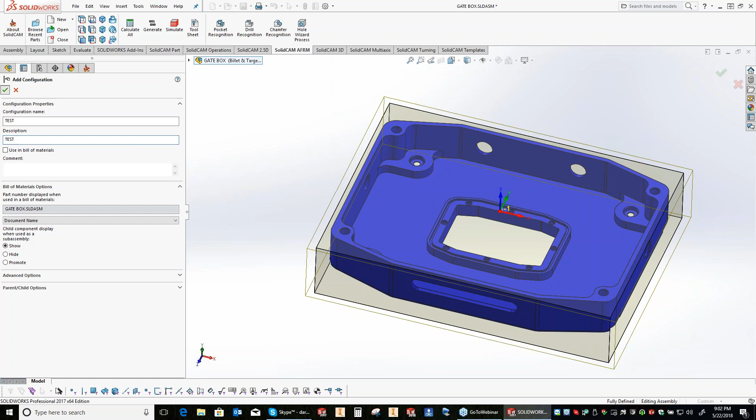Yeah, let's do that. Instead of inside of a CAM project, you probably don't want to really do that. You can do it, but if you want it to be more fluid, you're going to want to do it from here. So right click, add a configuration. We'll call this test. It's just what I do. You can do whatever you want. Okay.

Now I've got a test configuration, and basically this state is what the configuration is set at. But if I want to get rid of these right here, I'm going to suppress that, okay? But now in this configuration state, you'd have to go in here and edit that. It would be better if you did this. How come I can't get rid of it? Oh, because I'm in it right now. Let's go to that one. Okay, let's create this and delete it.

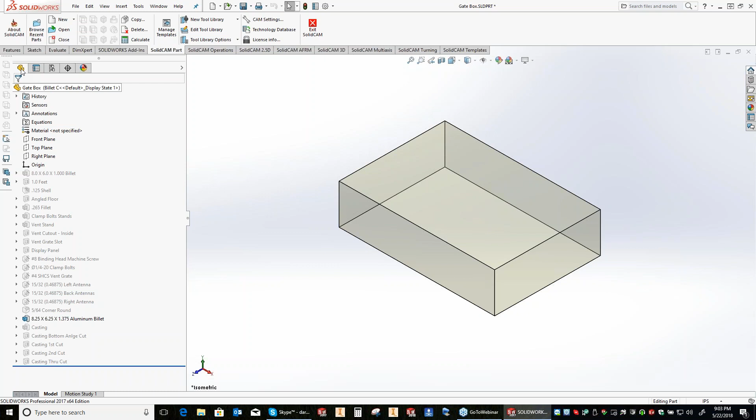The best thing to do is go to the configuration that you want, like let's say here, and then do to it what you like, suppressing those holes. Okay, so there's no more holes. Then create your configuration. I think this will work. Derived configuration, test, select OK. And where am I at here? What did it do?

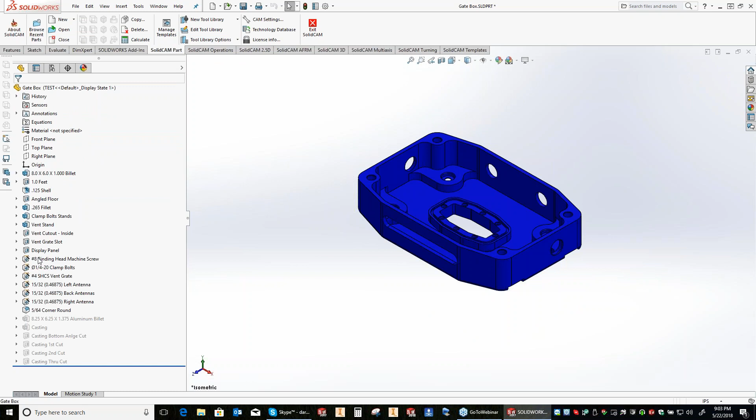Why am I on there? There it goes. Okay. So where's my test? Oh, I created it under here. Gosh darn it. Sorry about that, guys. You want to do it up here. Okay, let's go back and do that again. Now we'll do this configuration from here. I did a derived configuration from a configuration. All right, so now you have that in this state. But if I go to this state, the holes should come back. If they don't, no problem.

Come down to here, and you can mess with your configurations, when I can find it here. It's been a while since I've done this. Maybe I have to do it when it's on. So let me go back to here. No? I guess not. Hold on. I'll figure it out, 1 second. It's been a while. Where the heck is that? You can click on the configuration features. All right, test.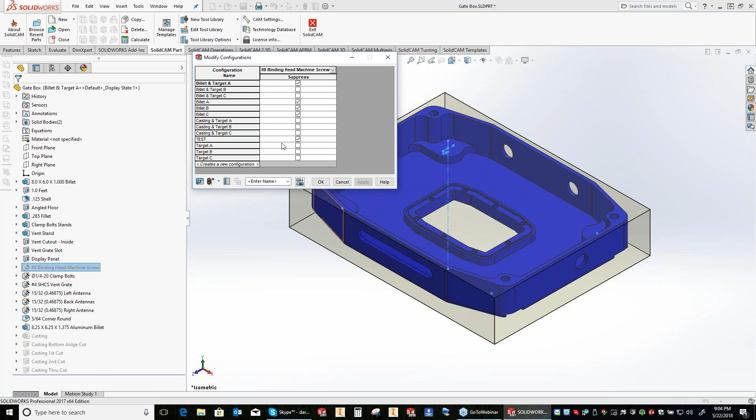Now this is not what I want. There's actually an easier way of doing this. I'm looking for it. It's right in here. I can't remember how to do this. Okay, hold on. Let's try this. Let's go back here. That's on and they're suppressed. So I'm going to unsuppress that, but for just this configuration. So that's what I need to find, for this configuration only. Yeah, this configuration, that's what I want. It's suppressed, but no, I want it unsuppressed. Sorry, I'm on that one.

Yeah, so Eric, to kind of answer your question, what you'll do first is you'll have your default configuration in there. Then go ahead and add your family of 3 different parts. Let's just say 1/4 inch thick, 1/2 inch thick, and 3/4 inch thick configurations. Then when you actually click on that configuration, you can go and change that thickness for each configuration. There we go.

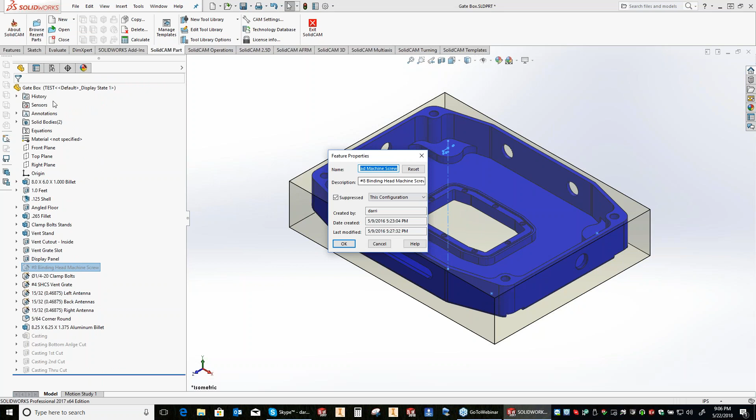I did it backwards, but that's how you basically do it. This configuration should be the other way around. I want them unsuppressed for this, so I'd come in here and unsuppress it. Then I would mark it as for this configuration. Okay, so that's what I want. Now for the next configuration, you just click on it, and as long as you're on this configuration, you can suppress it. So now you should be able to come back here, it appears, and back here, it appears. I think it's always set to all configurations, and that's what gets confusing. Set everything to this configuration, and you can get it to change back and forth.

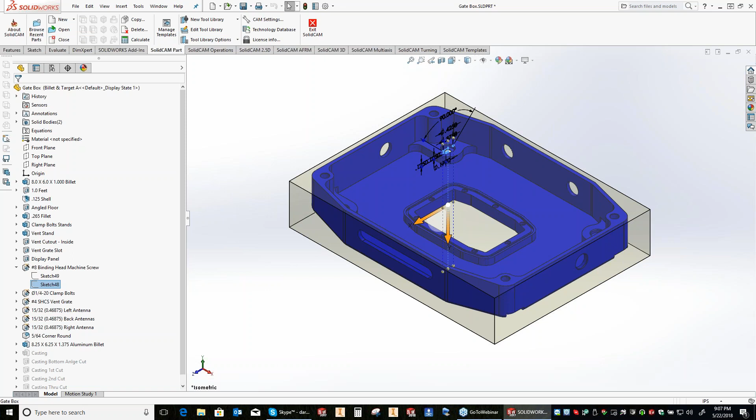And just FYI, when it comes to the actual sketch, let's say you're going to go in there and mess with the sketch, you have to go on a sketch level. So let's say that one, edit. In every one of these, there's a configuration right here for your values. So when you go into configurations for individual sketches, you have to do it in here. You want the feature there, but the feature's changing in size, you want to do that here. What I showed you was just the feature suppressing or unsuppressing. So just FYI, and Kevin can help you with that tomorrow if you need more information. It's been a while since I've done it, but that's how you do it.